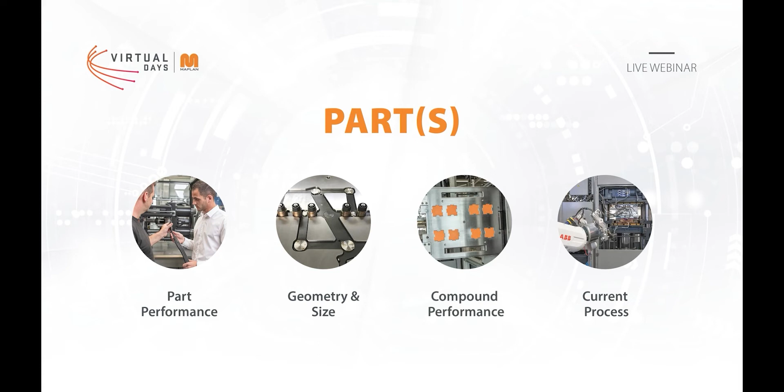What is the ultimate part performance requirement from the customer? What's the geometry of the part? If appropriate, what inserts will be in the part and what material are the inserts? What are the best processing conditions for the compound used to make the part? What is the current production process, and what are its successes and limitations?

After we gain a clear understanding of our entire situation, we need to determine the optimal molding process for the project. As Stephen Covey wrote in 7 Habits of Highly Effective People, we should begin with the end in mind and define the molding process best suited to our situation and our project before engaging in the evaluation of equipment.

Many rubber molders have capable process engineers on board and can work through this type of decision internally.

However, not all rubber molders are blessed to have that type of internal process talent. And there are so many process choices.

Do we use compression molding, transfer molding, or injection molding? Do we use a hybrid like injection transfer or injection compression? Do we use a horizontal machine or maybe a vertical machine? Do we use a 4-post machine?

There's also C-frames, tie-barless machines. Do we invest in an ergonomic machine so that our operators have an easier time, or do we spend less and get a traditional machine?

Do we use a hot runner or a cold runner? If we use a cold runner, do we use open nozzles or valve gate nozzles? Do we use a solid block or a split block? And that's just cold runners.

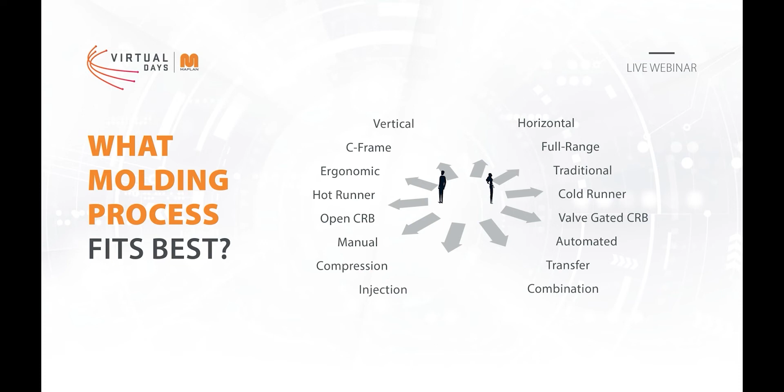And then do we use traditional manual operations, or maybe we move it a little forward and use semi-automated solutions like plate handling? Or do we pursue a completely automated option? The optimal process is discoverable through research and development by a capable process engineer, but you can also ask a trusted supplier like MAPLAN for help if you don't have the talent available for the project.

Now, once we have the properly defined and optimal molding process, and we know that's what we want to pursue, then we need to sit down and define all of the critical factors that could impact your CAPEX and your OPEX in purchasing rubber molding equipment.

When defining our critical factors, CAPEX and OPEX are like two halves of the whole decision. Anytime you have CAPEX associated to building a rubber molding process, this nearly always requires additional investment into other ecosystem components, above and beyond the molding machine.

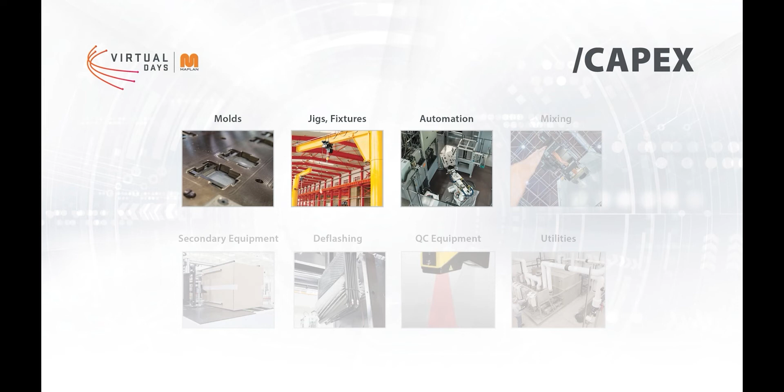So these additions could include tools or molds that are used in the machine, maybe jigs and fixtures used to equip the molds, so maybe a jib crane or something like that. Automation components, if you mix your own compound, the mixing equipment for that. There could be secondary operations equipment like trimming and slitting, maybe cryogenic deflashing equipment. You also have quality control equipment like measuring tools, lab devices, vision inspection.

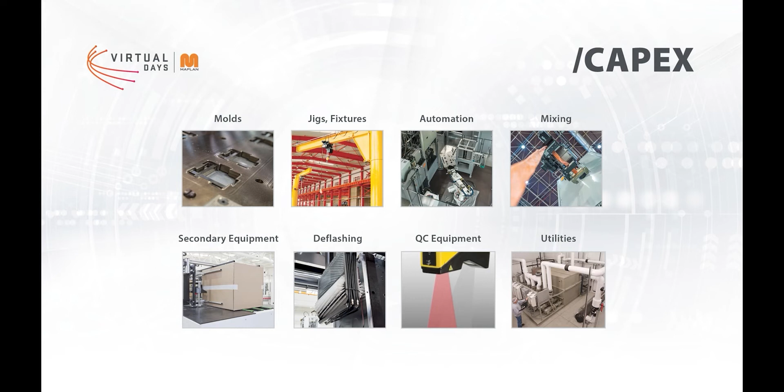And then you have facility utilities as well, so chillers, air compressors, exhaust systems. CAPEX is very distinct from OPEX, and typically it's incurred one time. It's incurred at an organizational level, and because of that, it's very highly visible to the organization.

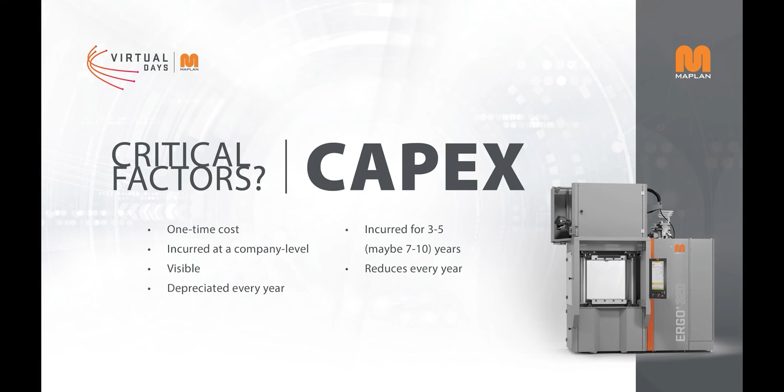Now, the advantage with CAPEX is that it can be depreciated every year for 3 to 5 years, and then reduced every year. So while CAPEX costs are an important thing to consider, and they are very visible, it's not the whole picture. It's only the first half of the picture.

So in looking at the second half of the picture, that's where OPEX comes into play. And we've broken this down into 5 different components: performance, material waste, consumption, labor, and maintenance.

The performance capabilities of the molding production process can impact cycle time, unplanned downtime, production planning, and part quality. A process capable of minimizing cure and maximizing cycle speed will obviously increase your part production per hour. A reliable process will minimize lost production time associated to unplanned downtime. And a consistent process will aid in planning production schedules. And then finally, a repeatable process offers more consistent part quality with fewer defect claims.

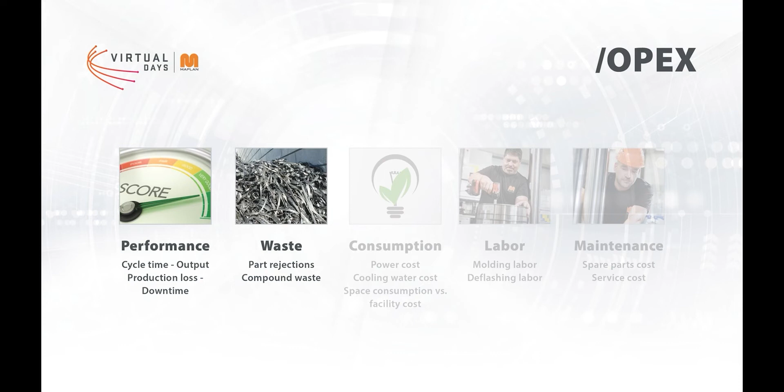The second thing is material waste, and that's often attributed to part rejections or scrap rate, but it's also important to consider the compound waste due to your startup and shutdown sequence. If you do compound changes, what's the cost of the compound between those? Any unnecessary compound purging between cycles. And then additionally, insert waste, maybe due to part rejections caused by a non-repeatable process. Those should also be considered.

Our third element is an ongoing cost associated to energy consumption. So that could be electricity, water for cooling, maybe compressed air. You could even consider the hydraulic fluid and filters with the machines. These factors may not show significant differences if evaluated over a single cycle, but they add up to pretty large savings when calculated over maybe the 15 to 30 year lifespan of your equipment.

Another consideration is the consumption of physical space compared to the part volume produced. Facilities have both actual and opportunity costs, so a more compact molding production process offers higher space efficiency.

Now, your process setup labor, your operator labor, your secondary operations labor, and even your maintenance labor are all also part of your OPEX concerns. If the molding production process offers minimized or maybe even eliminated labor in any of those areas, OPEX can be greatly reduced over the life of that equipment.

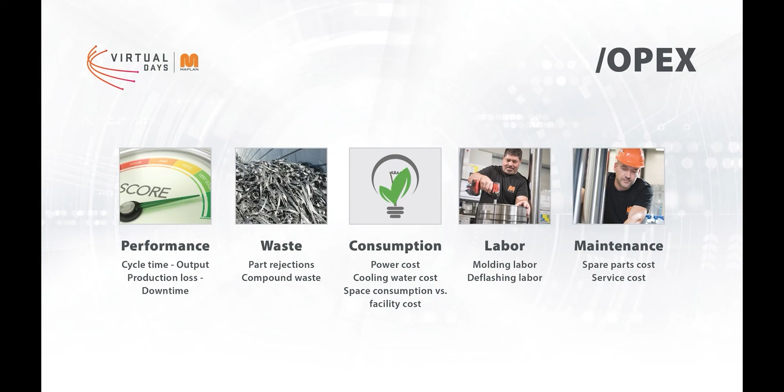Finally, ongoing maintenance of the system is always necessary in any production process. The required frequency and duration of that scheduled downtime, the costs, availability of parts, maybe the cost of labor from the supplier technicians, those are all going to impact OPEX as well.

Another non-financial aspect to maintenance is maybe the technical support offered by the equipment supplier. Are they capable? Are they dependable and available? Are they helpful and supportive when available? Mediocre supplier support impacts the duration and the reoccurrence of planned and unplanned downtime.

So, unlike CAPEX, OPEX costs are incurred every day. They are incurred typically at the plant level, and they're way less visible. We've even seen some circumstances where they may be hidden from management. They're not depreciable, and they will continue to increase over the lifetime of the equipment. One recommended method of evaluating OPEX could be using something called OEE, or Overall Equipment Effectiveness.

And this evaluates 4 different levels of production losses through schedule, availability, performance, and quality losses. So if you want a little more information on that, take a look at a website, oee.com.

So while CAPEX costs are often considered when quoting new projects and determining the business case of equipment, really OPEX will ultimately have a larger impact on the actual production costs.

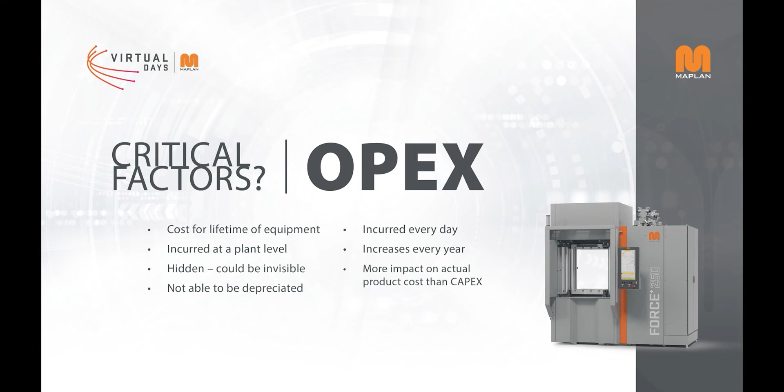Now that we've reviewed our organizational situation, we've determined the optimal molding process, and we've broken down the different components of CAPEX and OPEX, we can now launch into a standardized framework for evaluating these investment decisions.

This framework was formed through pretty extensive experience working and collaborating with our customers. It's worth noting that this standardized framework is really supposed to be a starting point, like a best practices list. You should be amending it to reflect your unique situation and your project within your organization.

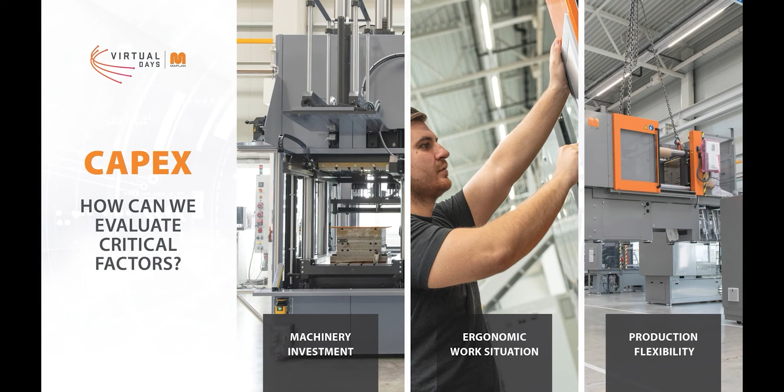So we're going to speed through these fairly quickly here. Let's look at CAPEX first. When evaluating CAPEX and looking at this framework, we can really break it down into 3 different sections: machinery investment, ergonomics, and production flexibility.

Within machinery investment, we should consider the typical things that people look at: the pricing, the lead time, and the expected longevity of the equipment. How long is it going to last?

Within ergonomics, we should consider the operator experience. What's the working height? What's the strip or stuffer height? What is the simplicity of the controls? Maybe what is the operator's exposure to heat and fumes? All of those other ergonomic aspects, along with the machine footprint.

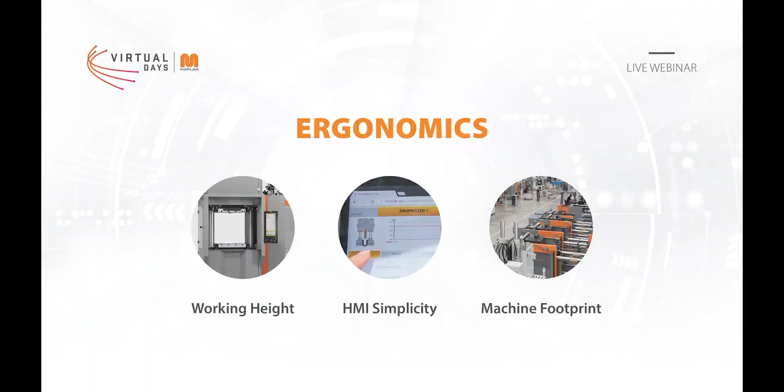That's another important piece. Then when we look at production flexibility, we should be considering the range of capabilities that machinery has to handle different compound types, different volumes, and different pressures. And then finally, you probably also want to consider the semi and fully automated production capabilities available and how the equipment connects with all of those other ecosystem components.

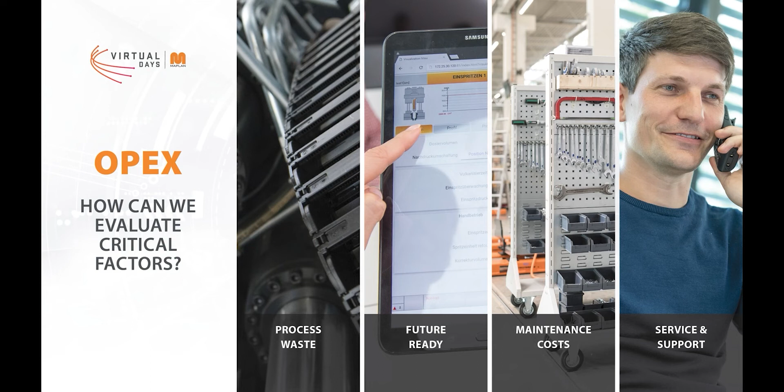So CAPEX really summarizes all of the equipment-related decisions. Now, when we look at OPEX, we can break this down into 4 different sections: process waste, future readiness, maintenance, and service.

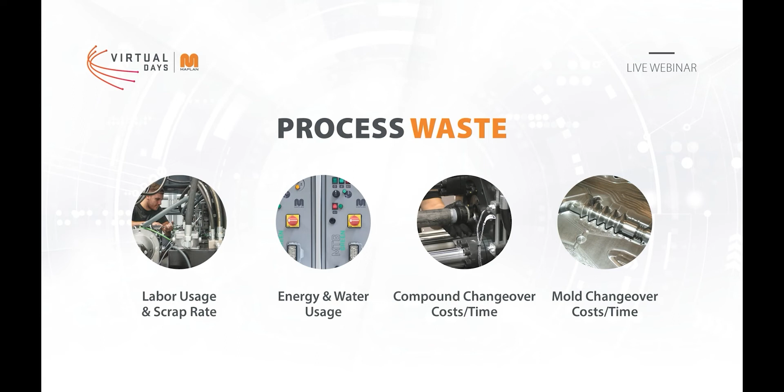Process waste should consider the labor, the energy, the water, air usage, scrap rate, compound waste, compound changeover costs and time, and even mold changeover costs and time. It's all of those wastes associated to the process.

Future readiness, that's where you want to evaluate things like the equipment's ability to add automation options later, maybe remotely access the machine for service and support, conform to new Industry 4.0 features like machine learning or machine communication.

Then when we look at maintenance, we should be evaluating warranty length and coverage, spare parts cost, what's the required frequency and duration of maintenance, and then ultimately, what is the unplanned downtime of that machinery.

Service should then consider the responsiveness to requests when there is downtime, and that could be the initial response and the physical response if needed. So, initial response could be the phone call or remote access, and then the physical response would be on site. Then you also want to look at the capability of the remote service—how much support is there within that—and then the availability of regularly needed parts.

So that's the framework. By using that framework, after taking the time to understand your situation and then determine that optimal process, hopefully you'll be better able to truly evaluate the complete picture, the OPEX and the CAPEX, when the time comes to invest in molding equipment.

So we've gone through a lot of different pieces. We've talked about a lot of different things. This framework's good in theory, but let's look at a specific MAPLAN customer example to see how it could be applied.

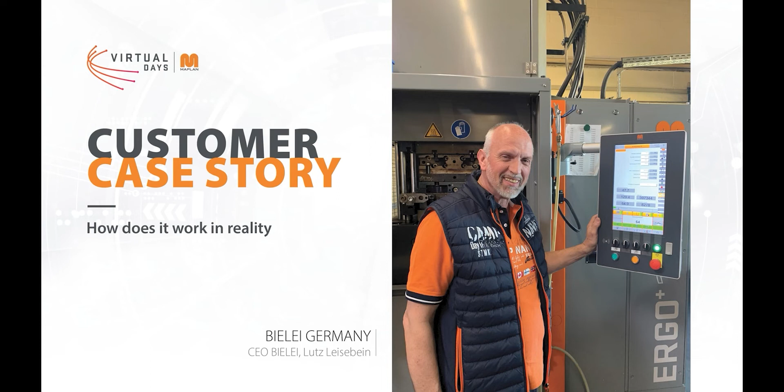Our customer case study here is a company called BIELEI out of Germany. The image that you see on your screen is Lutz Leisebein, who is the CEO of the company. BIELEI is a smaller rubber molder. They have around 25 employees and 9 injection molding machines.

And they recently went through the process of replacing an older Pentaject vertical injection molding machine. It's important to note that Pentaject is a previous MAPLAN brand, probably around circa 1980s. The evaluation they went through compared both the CAPEX and the OPEX components in order to determine the overall ROI of that machine investment. So what's interesting about this is that we compared that older Pentaject machine with a new Ergo Plus machine from MAPLAN's lineup.

The comparison of the figures you see on your screen summarize what we found during the OPEX component of that evaluation.

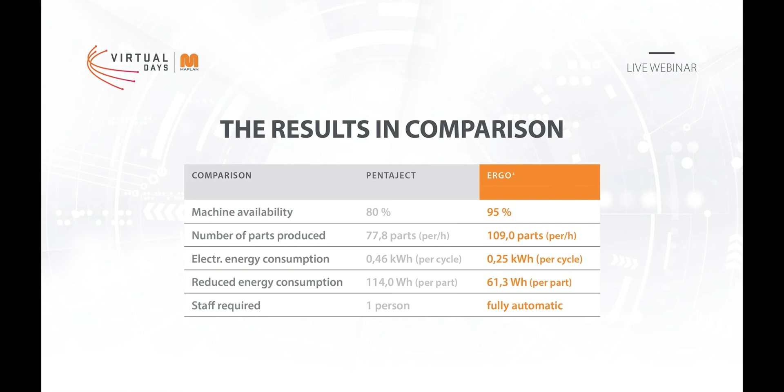Machine availability on the Pentaject was about 80%. The inverse of that would be downtime, both scheduled and unscheduled, so roughly 20% downtime. On the Ergo Plus, we have machine availability around 95%, so about 5% planned or unplanned downtime. In addition, the number of parts produced per hour was much greater on the Ergo Plus than on the Pentaject.

Part of that is because the Pentaject required an operator, whereas the Ergo Plus we were able to go fully automatic with this solution, and that makes better throughput. There's more technology involved than just the automation, but that's probably one of the larger influencing factors.

Now the consumption was also interesting. We looked at this both on a per cycle basis and a per part basis. The electrical consumption from the Pentaject was about 0.46 kilowatt hours per cycle, and on the Ergo Plus we're about half that. In addition, the per part electrical consumption was 114 watt hours versus 61.3 watt hours, so we're even able to break it down all the way to the part.

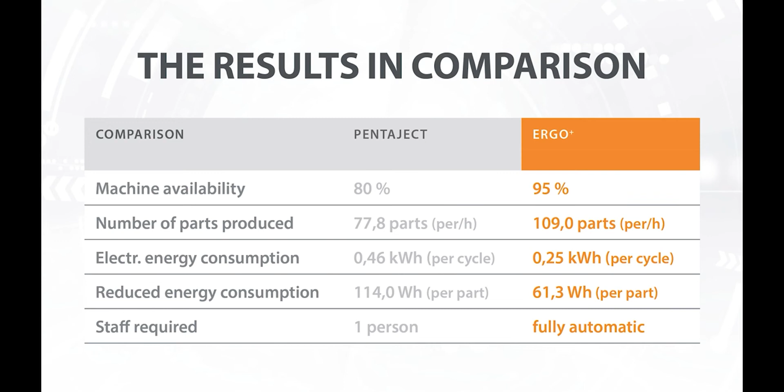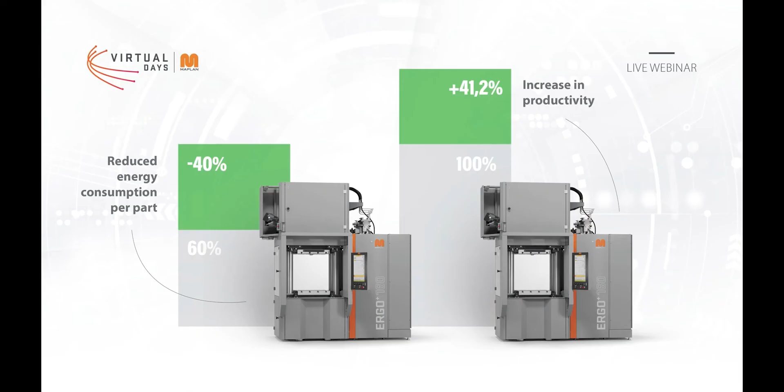This data comparison is interesting, but if we look at the summary we see some pretty staggering comparisons. We were able to reduce the energy consumption per part by about 40%, while increasing productivity 41.2%. So when you compare the OPEX components, we see large savings on energy consumption and throughput increased in addition to that while reducing energy consumption.

So this is one particular case study. It's certainly not indicative of all customer circumstances, but it's a really interesting case study of a company who was able to look at both the CAPEX investment and the OPEX components to determine what the best solution was for them.

Now, one of the things we wanted to do when we set out to create this webinar is go through these different components and offer a sustainable project planning methodology, but we also wanted to give a resource so you, our viewer, would be able to approach it in a similar manner. So what we did is we created an evaluation spreadsheet. This spreadsheet has both components, CAPEX and OPEX, and it breaks down a forced ranking system to be able to compare multiple suppliers. So what you see here is that evaluation.

What you would do is take each of these components in the different CAPEX categories, the elements we broke down before. For instance, machinery investment has a max percentage of 33%, but we use pricing, lead time, and expected longevity as the subcomponents that build the score.

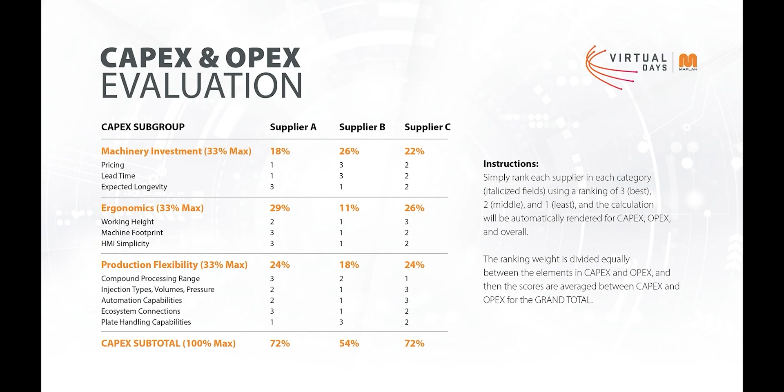But then when we go down further into ergonomics and production flexibility, we see a bit of a change. We see a higher ranked supplier A, and a tied supplier A and C for production flexibility. Then when you take everything into consideration under CAPEX, we find that supplier A actually ties supplier C, but supplier B, who had the best machinery investment and on a surface level looks to be the best, actually ranks the worst when you look at all of those other components.

Now again, that's the CAPEX side. If we go to the OPEX side, we can see process waste, future readiness, maintenance, and service and support all in a similar manner. Since there's 4 mechanisms instead of 3, these have a 25% max score.

And we go through the same process. So we rank all 3 suppliers, assigning a 3 for the best, 2 for the middle, and 1 for the least. The system adds up all these components. Our OPEX subtotal shows supplier A actually has the best OPEX score, followed closely by supplier C, then supplier B at a solid 51%, not great. Then we average the CAPEX and OPEX scores to get our grand total for that group.

Again, I want to restate that this is a framework that offers a good starting point. It's not an end-all be-all, and it won't be perfect for all circumstances. So sharing this spreadsheet and this resource is really meant to be the beginning for you. When you go through your initial company meeting and work through all those components to figure out your situation, determine your best process, and walk through this type of spreadsheet, ultimately you may add things, change the force ranking percentages, add another supplier, or remove one. But the spreadsheet is there as a resource to give you this framework and allow you to adapt it to what meets your needs best.

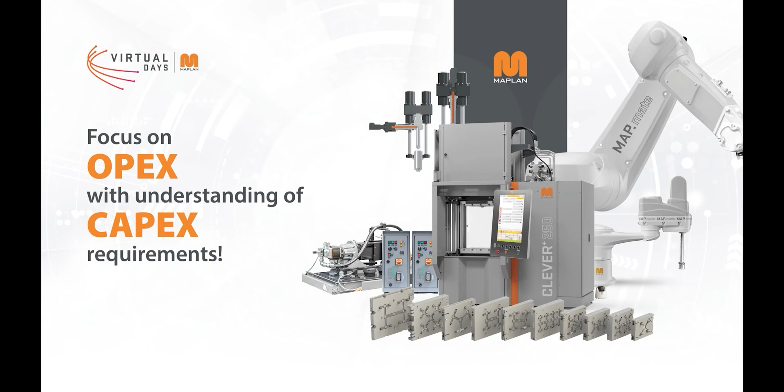So we've talked a lot about the CAPEX and OPEX sides of a purchase decision. Ultimately you might be thinking, how does MAPLAN compare? And what a good question. MAPLAN really carries an understanding of your CAPEX requirements, but we have a focus on OPEX. There are many different technologies we could talk about. We'll save some time today and only hit on a couple. The example here is a MAP auto cell.

In this MAP auto cell, this is a 360-degree turnkey solution. This would be the type of solution that might be appropriate if you don't have that internal process talent. But we have a couple different technologies here to talk about.

First is MAP FIFO Original, our original injection unit. This includes something called all-out technology that allows you to minimize compound waste between compound changeovers and mold changeovers. We also carry a different injection unit called MAP FIFO Ergo, which has a lower strip access so operators can reach up and feed the rubber in. This auto cell also includes MAP Cool Drive, our consumption-saving servo hydraulic system.

In another video during Days of Technology, we talked about our cold runner blocks, our MAP CRB series, so I invite you to check that out. All of our cold runner blocks are designed to minimize your compound waste.

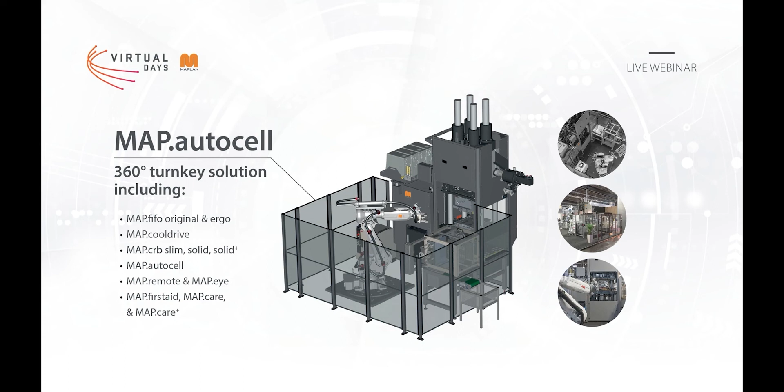We also carry MAP Auto Cell, like you see here, with fully automated and integrated solutions. We also have semi-automated solutions if fully automated isn't your thing. On the service and support side, we have MAP Remote and MAP Eye, options for us at MAPLAN to remotely support you and for you to remotely support yourself. These give remote access and support to machines and production cells. We also carry MAP First Aid, MAP Care, and MAP Care Plus, our spare parts packages, and you can stock the appropriate amount of parts based on your risk tolerance.

We can talk about these all day, but we just want to invite you to reach out to us if you have any questions or want more information, and we will connect you with your appropriate sales team.

Thank you very much, Ben, for this nice contribution. I'm convinced that a lot of people are interested in this CAPEX and OPEX topic, also when you think of sustainability.

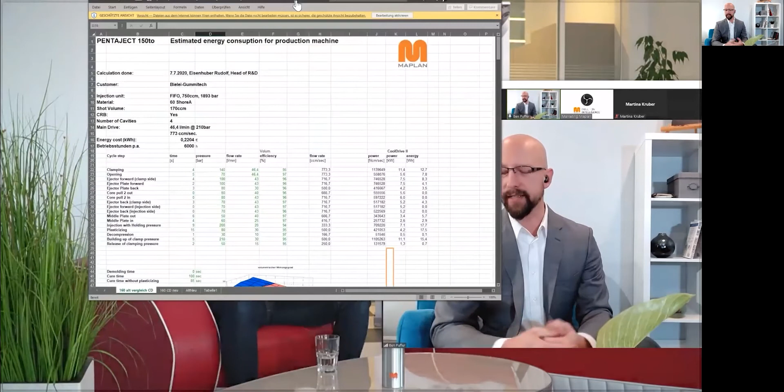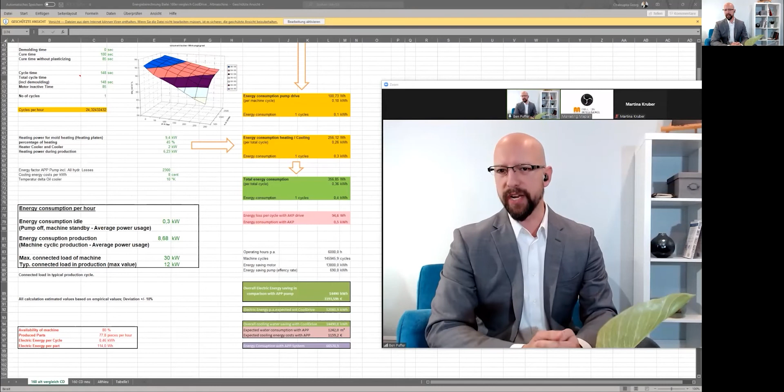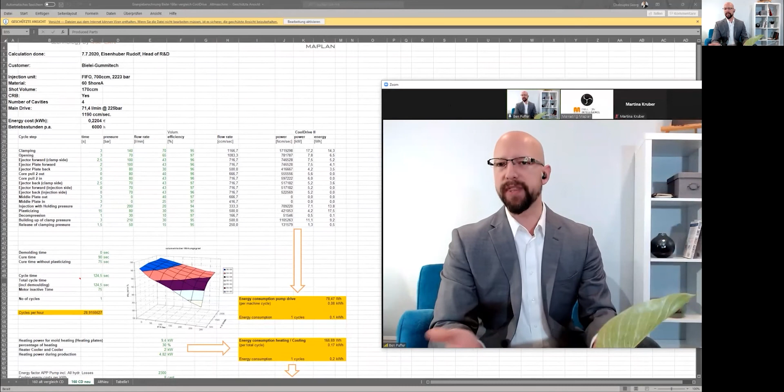Along that same line, our team has developed a couple of resources we use on the sales side. The first is a consumption analysis document, which we've used on multiple projects. The example here we used specifically for the customer case study with Bielel. This tab shows the overall actual energy consumption of the Pentaject machine - we can see energy usage due to the machine itself, the heating plates, and the water consumption, breaking all of those consumption pieces down into a final assessment. The second tab shows a comparison to the Ergo Plus machine, and looking at both side by side helped us understand the difference in energy consumption and helped with the analysis for the customer. So this is one specific example - an energy consumption study.

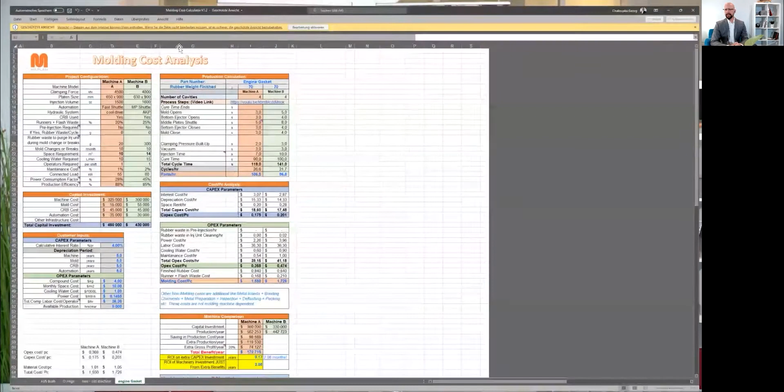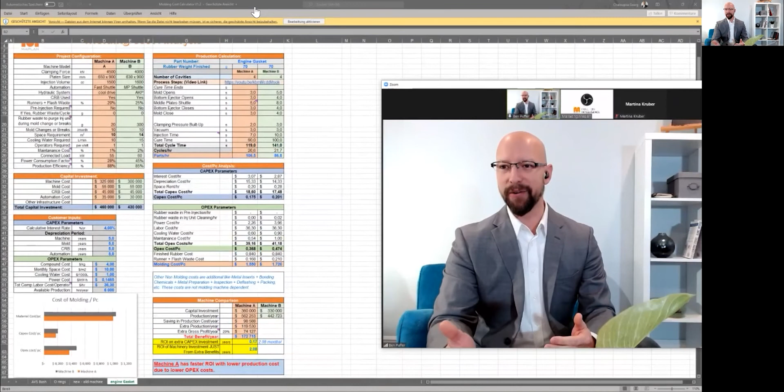A second spreadsheet we use is an ROI calculator. Compared to the force ranking spreadsheet we shared earlier, which was designed as an aid in decision making and probably gives CAPEX more weight than it deserves - but what rubber molder doesn't look at CAPEX as a barrier to entry? You always look at the cost of equipment on the front side in your evaluation. This other spreadsheet helps break down all the different elements associated with both CAPEX and OPEX, and then calculates an ROI. We use those two things on a case-by-case basis. I'd invite listeners, if you want to evaluate your specific circumstance, touch base with your sales team, and we can go through those tools with you and help you understand how they apply to your situation.

Thanks very much for this answer. This brings us directly to the second question: what seems the best return on investment option for developing process engineers from existing employees? What a good question.

I'll address the first part of that. We can all acknowledge that attracting and hiring external talent is pretty costly - it's expensive to find, you have to invest time, or maybe hire a headhunter, and there's risk associated with that. So hiring someone from outside the organization can be unnerving. That's a great question of how to take lower risk if you have people on staff you can invest in and minimize that risk and expense. One thing I'd recommend, from experience with customers, is you need to identify that type of person very quickly, because when that person comes on staff and you see the potential in them, the ability to invest themselves into becoming a process engineer, you need to capture that energy and effort to move them forward.